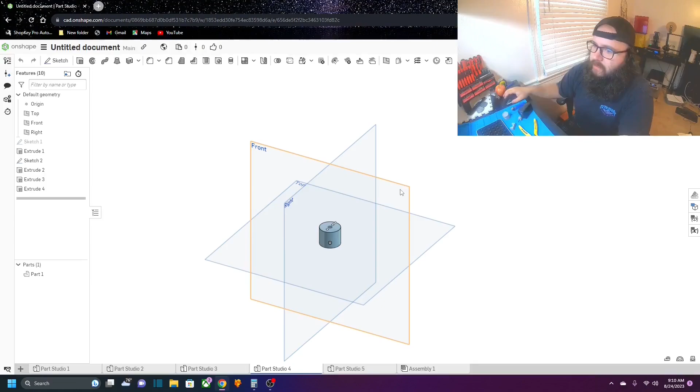So I'm going to reprint everything, change some of the dimensions, especially, let me show you guys, these holes - I'm going to make them a little bit bigger, and 3D print it on the resin printer to make it smoother, because it is a heck of a lot smoother. Now it does leave a little edge here, which you'll see where I cleaned it off. But it does leave a little edge there.

So what I'm going to do is print it on that one, make this right here a little bit bigger so that I have more room, just slap this back together and show you, more room between the connecting rod and those two pieces right there, so I ain't got to worry about it rubbing against this.

So I need to figure out a way to connect these, because at first I thought I was going to take a through bolt, go through here, recess the hole right here, and come in like that. The problem with that is that's a lot of hardware, and I don't think it's going to be that strong. So what I'm going to do is take these studs that I made with the resin printer, make the pieces, glue these studs in there.

So, like I said yesterday, since it doesn't have any weight, this is the test piece, and it's strong. Of course, these are screwed in. That's all I did, and basically it's strong enough that it's not going to want to rotate around that.

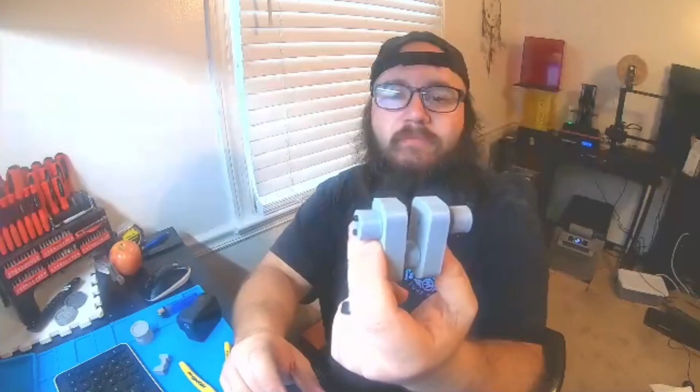And basically I can do this - my whole connecting rod slash brain fart crankshaft. So that's my crankshaft.

And right now I'm only going to make one cylinder, or a one cylinder engine, but I'm just going to make it so that if I wanted to, I can stack like 4 of them or 6 into a row and have a continuous engine. So for right now, we're just going to start with one cylinder.

Once we got the one cylinder engine done, because I'm going to do the valve train and all that stuff too - I want to go ahead and do that. So I'm going to go ahead and 3D print it out of the resin, prep everything, and put it together, and I'll show you guys what I'm working with.

Alright, so we're in the slicer, and we need to find our files. I don't need to open the scene. I need to find the pieces that we just saved, which would be this one and this one.

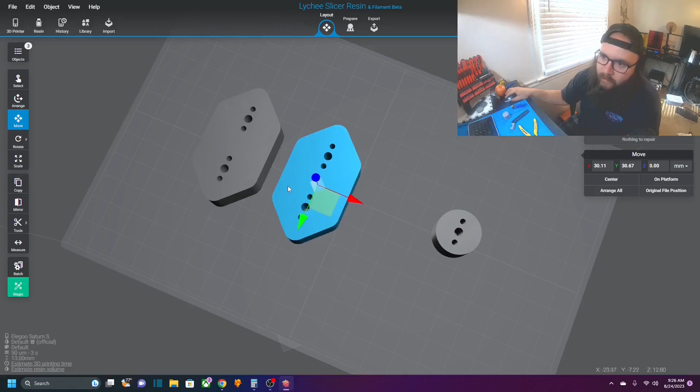So that's done. And these will be a totally different color when I'm done. Matter of fact, I think they're going to be a bluish red crystal color, because that's what I was printing before. So I need to print 2 more of these.

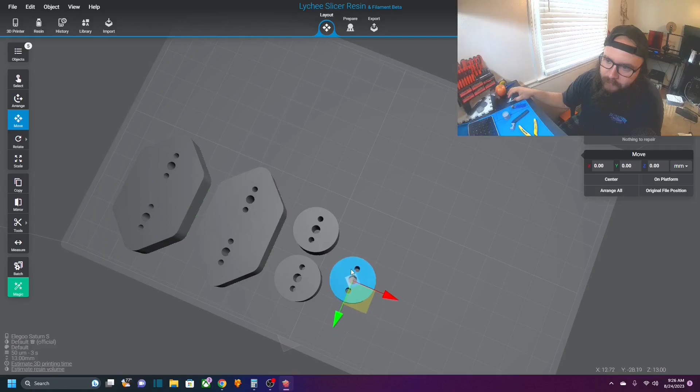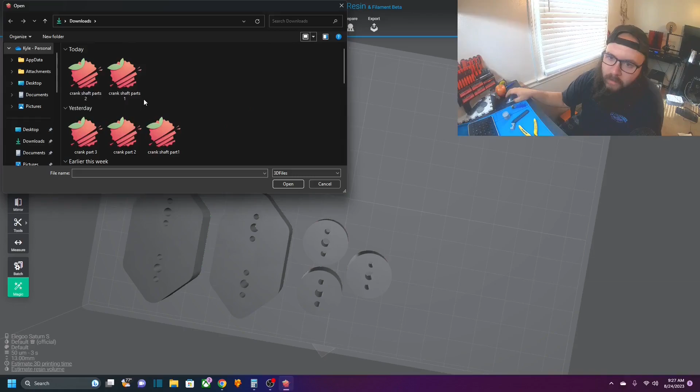And what I'll do here, try to find... there we go. And I made these. If you're interested in one, hit me up.

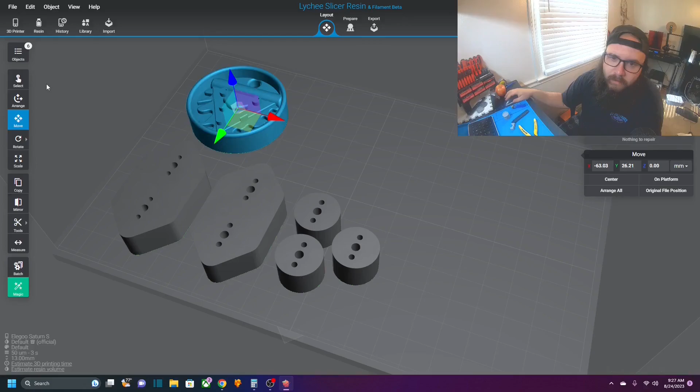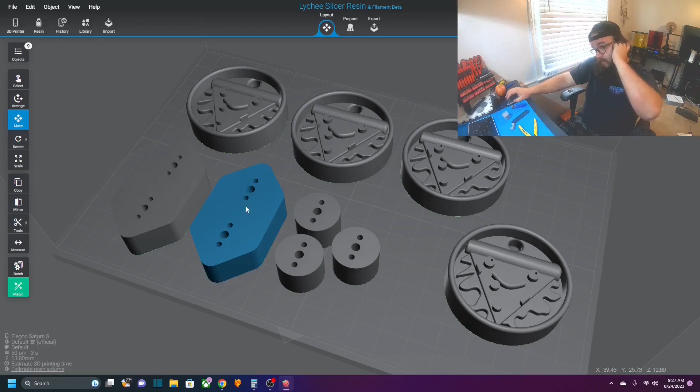Copy, 3 more. Making... so we have the 3 pieces that we need for the crankshaft, and you know, my extracurricular here.

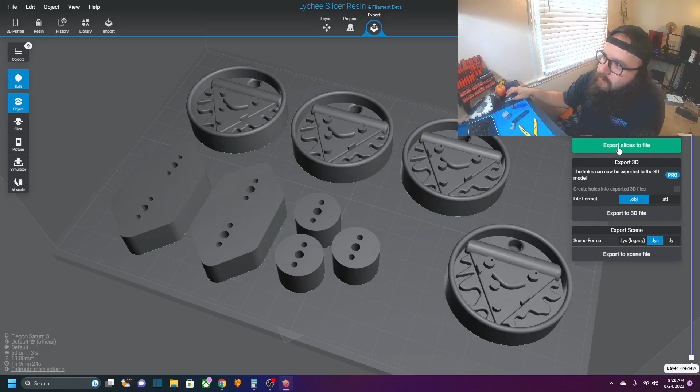So basically what I'll do is hit the slicer, which I don't know if you're going to be able to see how much time it's going to take, but it's going to take 1 hour and 9 minutes. So of course with this slicer, unless you own the pro version of it, you have to look at ads every time you go to slice.

But you know what, that's the cost of using free stuff. Not really mad about a 20-second ad. I don't like watching ads on anything else though.

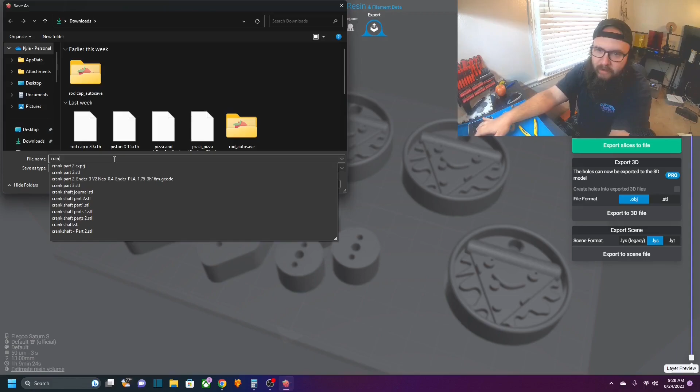We will name this Pizza Crank. Sounds like a fun night. As you can see, I have some parts just chilling where I've been messing around. Pizza and Crank. What a night.

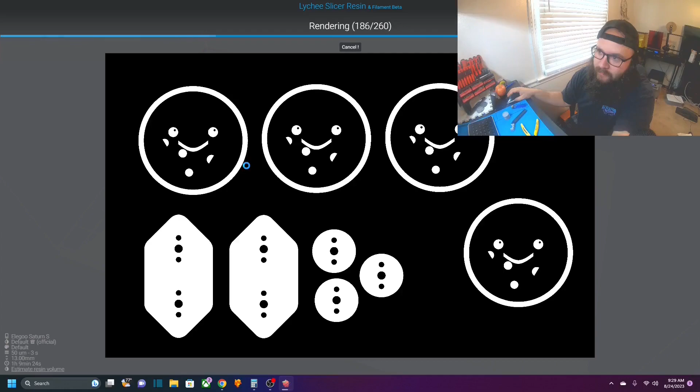Alright, and you can see it's slicing. There we go. Alright, so I need to plug in the flash drive.

This is the fun part. Drag and drop files like a boss. Oh, here you go. Now you can see the time. Duh.

Open folder. Got my flashy drive hooked up. I believe it would be this one. It is. Back up to downloads. We're going to slap that into that.

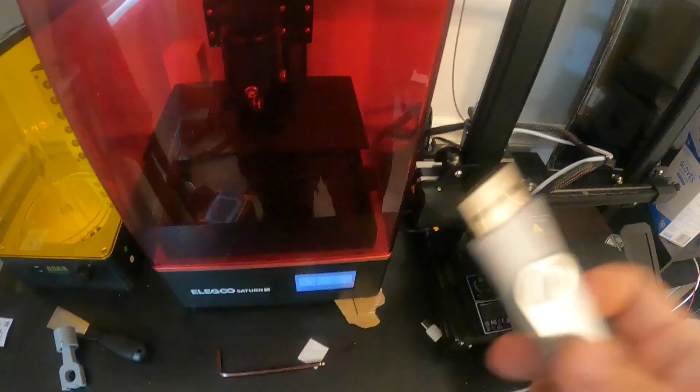Alright, now we're going to move on to the printer and print this jank. Flash drive on the Saturn S goes right here in the cut, which I guess I could make my setup a little more ergonomic, but this has been working.

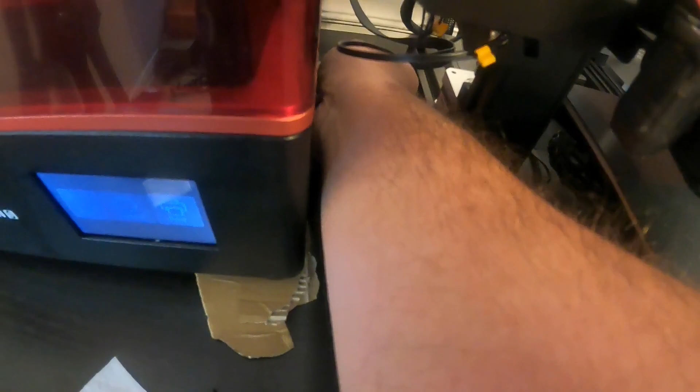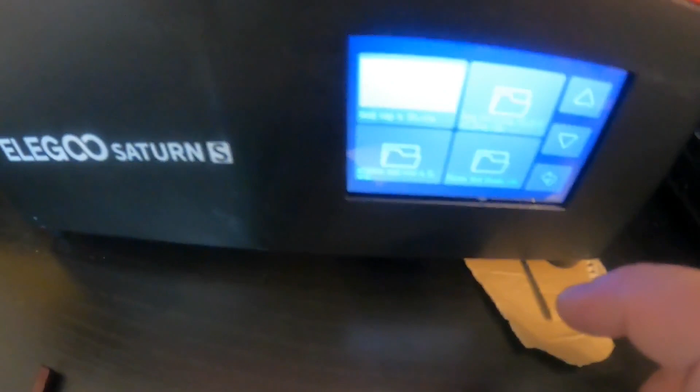Of course, I have the PLA printer, curing station, all that, and when I do cure stuff, if I'm printing, I put this in between just in case. But here we go, and it's just like an easy bake oven.

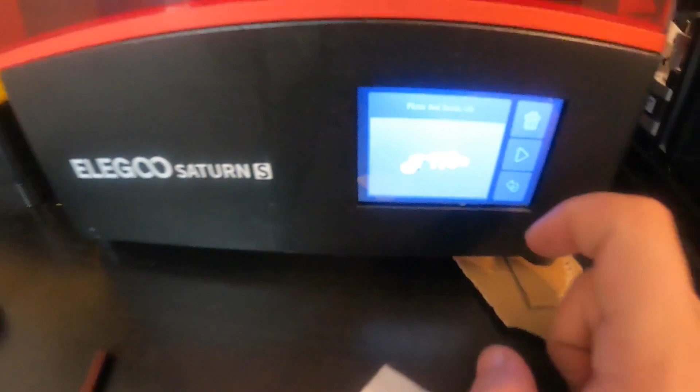What we're gonna do is find pizza and crank. Pizza and crank, bam, gives you a little preview. All pow, and let's go. I'll bring you guys back in an hour or so.

Alright, so game plan is to take these, and I've taken a drill already. Yes, I know, I can use a drill bit or one of the bolts and use that to get the hole just right for an M2 bolt.

So what I'm going to do is take one of these, which I've already prepared, slide it through here. So we look here, it goes through there, and then goes into there, which lines everything up.

You have 3 locations to line it up. So there's 2, then you have the center point, which you can actually tighten down in there with your trusty Allen key here. So I got that. So there's 3 spots that this will be lined up with. Of course, now it's going to act a fool.

So tighten it down. Tighten it down so that everything lines up.

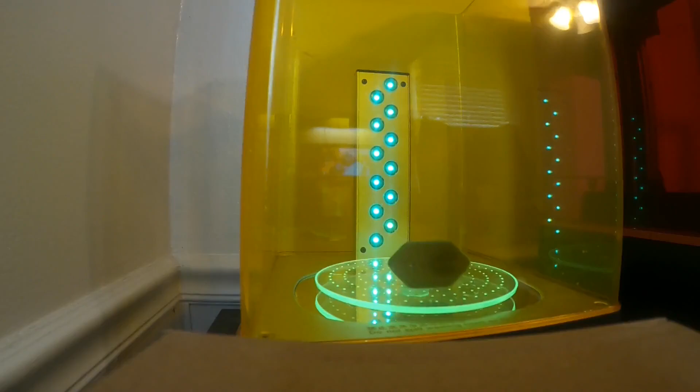So it actually turned out pretty good. It's strong, I can't break it off of there. There's no flexibility to it. So moving on to the next step.

I've already pre-done this one. So same concept, all the pins-ish. We're going to line everything up so that it is one piece, and then we'll run it through the curing station, as long as everything lines up here.

I think I need more right around the edge here, so we'll get that in there. I think this is going to work pretty good because it's clear. It's probably the only one it's going to work with. Make sure all this stuff's lined up. There we go. Alright, I'm gonna run it through the curing station real quick.

I think I got a little cattywampus here. Kinda hoping I can - yep, that's what I wanted. Still some of it in there, but that's what I wanted to be able to do. Didn't work, but the other piece definitely sat on there pretty good. The problem with this piece, I get it straight.

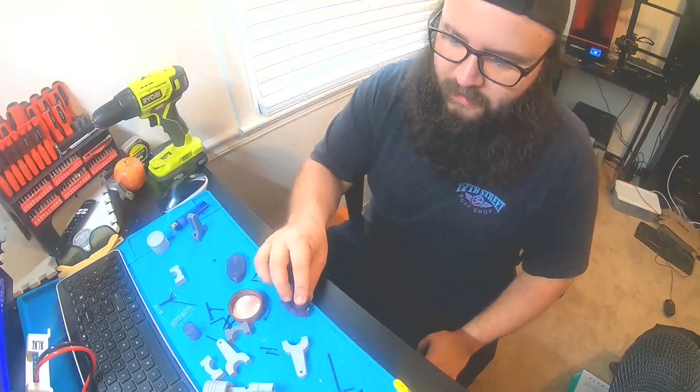So what I'll do is clean this off because half of this isn't cured yet. And it peels right on off of there. Alright, so I need to do that again. Take my little napkin here, clean off the excess. Try again, because that did not turn out the way I wanted it.

Let me put the bolts in there again. One, bolt 2, bolt 3. What I'll do - oh, they're a little thicker, like. I did see a gap. That was one of the problems I believe was causing this not sticking and it lifting. So I need to get stuff on there better.

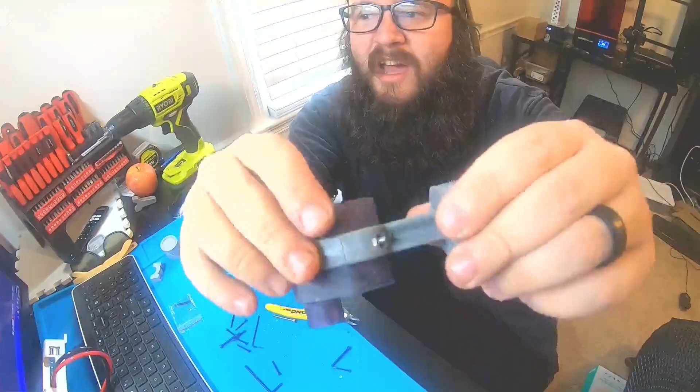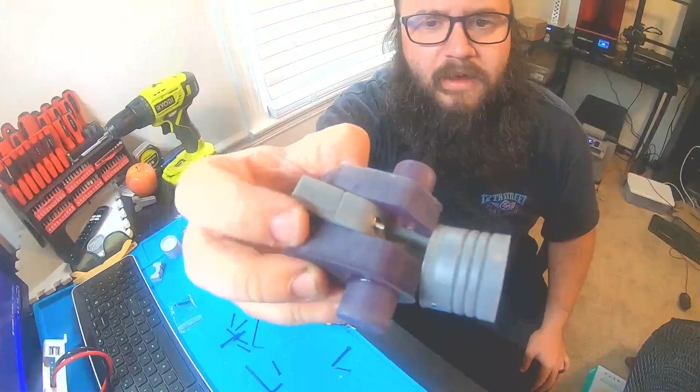I'm going to keep on moving along. I do recommend for sensitive and high clearance parts to use the resin instead of - which, give me some pointers for this PLA stuff - one, it's cheaper to use. But I would definitely like some pointers on how to set this up. I'm sure there's like 8 million YouTube videos I can watch to figure this out. But I have a full-time job, and I'm not gonna sit around and watch YouTube videos all day. But I will make some just for fun.

But till the next video, we're gonna start working on the block so that we can move this up and down, very, very slowly. Till the next one.